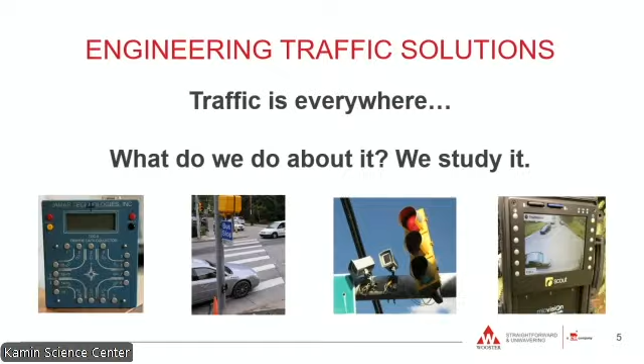Thank you, Jerrod. So I am Josh Haydo, Senior Traffic Lead at Wooster and Associates. I'm going to talk about the first aspect of these projects, which I take the lead on. It's a multi-step process. What we know is traffic is everywhere. So what do we do about it? We first have to study it. So I'm going to talk a little bit about traffic studies.

So first step in any sort of study, and in a traffic study as well, is identifying the scope. So that entails two major questions. What are the issues? What are the concerns? Obviously, when you think about traffic, you think about congestion. So that's measured in two different ways. Typically delay, which is how long you're sitting, waiting, not moving, getting frustrated when you know that you should be moving. And then that's directly correlated to stacking and queuing.

So, when vehicles experience excessive delay, they begin to back up. So that's not only frustrating, but it can cause safety issues when those queues block driveways, block intersections, or create sight obstructions for other motorists on the road. And another aspect of all of our studies that kind of weaves through all of these things is, of course, safety. A couple aspects of safety are visibility and sight distance. Being able to see other motorists on the road, whether they're approaching you, making sure they can see you when they're coming up behind you.

And also, when you're turning onto a road, being able to see to your left and to your right without obstruction to make sure that you have adequate room to merge out onto the highway safely. Speeding plays a role in that very thing, sight distance. Obviously, it's a little bit easier to merge onto a road when traffic is going 20, 25 miles an hour. When traffic's going 50 or 55 miles an hour, you obviously need to be able to see vehicles when they're much further away in order to make a safe maneuver.

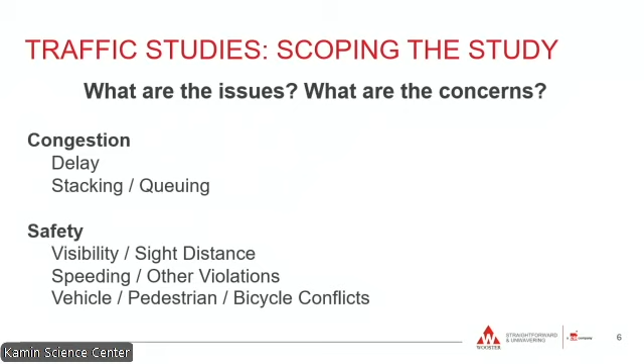And then finally, we're primarily focused on vehicular traffic tonight, at least in our discussion, but pedestrians and bicycles always play a role in that as well. So that's another aspect of our studies that's always there, in some cases or locations more so than others. Downtown Pittsburgh, obviously you're going to see a lot more pedestrians, a lot more bicyclists, but it's always a consideration when we are identifying the scope of the study.

So 3 basic questions. What are the concerns? Where are the issues? So, is it an intersection? Is it a series of intersections? Is it a corridor? And then when do the problems occur? So this could be days of the week or time of the day.

Typically, we look at peak hours, rush hours for commuting, which historically has been between 7 to 9 a.m. and 4 to 6 p.m. But different studies sometimes necessitate looking at other periods of time. We do a lot of work for schools. School arrival occurs between 7 and 9 typically, but school dismissal obviously happens starting at 2:30. So we're expanding our study timeframes to make sure we capture that school traffic.

Same thing, places of worship may have Sunday traffic that's its biggest peak in traffic. And then of course you have situations like here on the North Shore with 2 stadiums, the Science Center itself, a music venue, special occasions where those things may vary from day to day, week to week, different times over the course of the year.

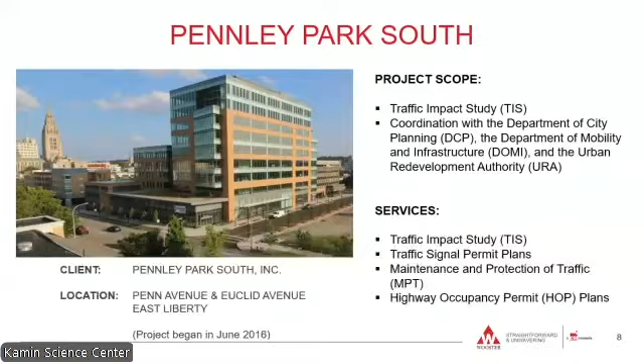So Jerrod briefly mentioned one of the projects we worked on. This is just kind of an example of applying those principles in the real world on a project that we did in the city. This is Pennley Park South in East Liberty. You may know it as the Whole Foods at the corner of Euclid Avenue and Penn. Some challenges we faced on this project were the presence of many pedestrians, many bicyclists, and at the same time as we were doing this project, which began in 2016, the city was in the process of converting Euclid Avenue from a one-way street to a two-way street.

So obviously we had to coordinate with a lot of different entities, the city of Pittsburgh, the Urban Redevelopment Authority, and others, to make sure that, when we were looking out in the future to when this development was going to open, which is the case now, our conditions that we were analyzing are true to what is actually out there, which wasn't the situation when we began.

So how do we conduct a traffic study? The first thing you need are traffic volumes, and collecting traffic volumes is as simple as you might think. You go outside and you count cars. The picture here on the lower left looks like a really boring video game. That's actually a traffic counter. When I first started at Wooster 13 years ago, one of the first things I had to do was sit on the side of the road for 2 or 3 hours at a time and count cars and press those buttons on that counter. And that's how we got our traffic data.

Technology's obviously advanced even in that short amount of time. We now use cameras. So this is the computer and the screen for a camera. It's mounted usually on a utility pole or something close to an intersection, 15, 20 feet up in the air with a bird's eye view of the intersection. That video is recorded and then reduced electronically, and we're able to have our counts without anybody being on the site except to set up and take down the camera.

And going even further, now we have drone capabilities where we don't even have to set up a camera. We can have someone set a drone to hover over an intersection and do this very thing, record that video and process it in the same way, and we have traffic counts within a matter of hours.

One other tool that we use, automatic traffic recorders or ATRs, you might know them as tube counters. You ever driving down the road in your vehicle and hear thump thump? If you're anything like me, before I knew what these were, that would always cause me to slow down when I saw them or when I hit them, thinking that this is the police or law enforcement out trying to give tickets. That's generally not the case. That's engineers like us collecting data.

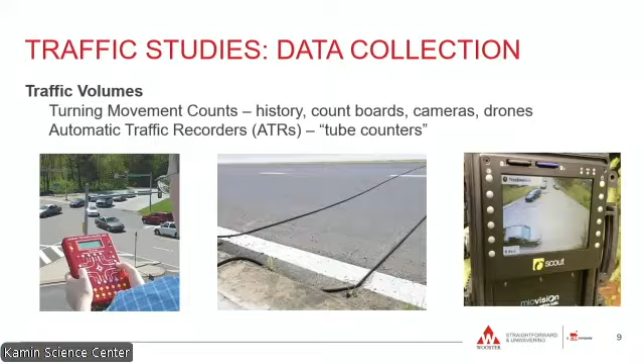So these are useful because they can be set for longer periods of time, can leave these down for days, weeks, even months, and they collect not only traffic volumes, but they identify speeds and also vehicle classifications. So when you're studying a traffic flow, it's important to differentiate and understand the composition of that traffic. Passenger cars operate differently than a delivery van or a tractor trailer. So understanding the composition of the traffic you're looking at is going to have impacts on the results of your study.

So as we're collecting traffic counts, we're of course identifying the presence of pedestrians and cyclists, looking at speeds. And then another aspect is, so we've talked so far about the traffic and the vehicles themselves. It's also important to identify certain characteristics of the roadway network itself.

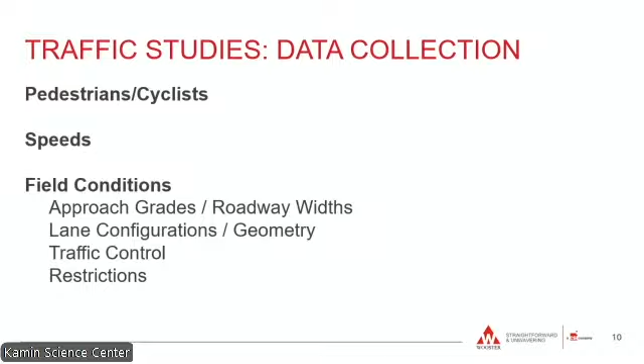So those are things such as approach grades and roadway widths, lane configurations, geometry, traffic control, be it a stop sign, a multi-way stop, traffic circle, signal, and restrictions, one-way streets, things like no turn on red. This is all information that we need to collect when we're doing a study to make sure that we're accurately modeling the study area.

So you have to deal with things like vegetation, embankments, parked cars, all things that we look at to ensure the safety of motorists, pedestrians, and bicyclists when we're conducting our studies. So at this point in the study, we have our existing conditions. We have what traffic is like today, the condition of the study area.

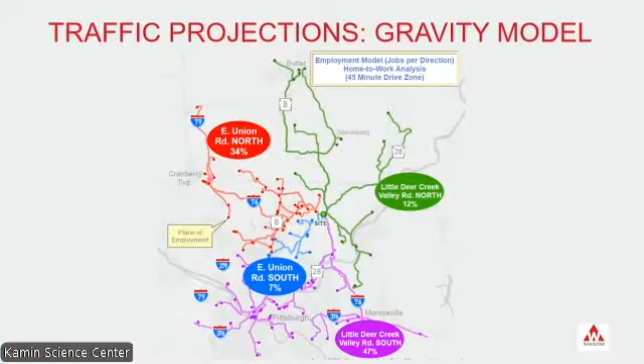This is just another example of a gravity model with a bit more detail. You can see it can get very, very granular in terms of the distribution of traffic. Now, the modeling. So we've gathered all of our information. Now we have to plug it into modeling software. There's a couple of different options. There's many more than this, actually.

We primarily use something called Synchro and SimTraffic. An alternative is HCS, and then VISSIM is a more robust model. We're going to show that to you at the end of this presentation in our case study for the West End Bridge. But they all do more or less the same thing. Some have some different capabilities, and this is technology that is constantly evolving.

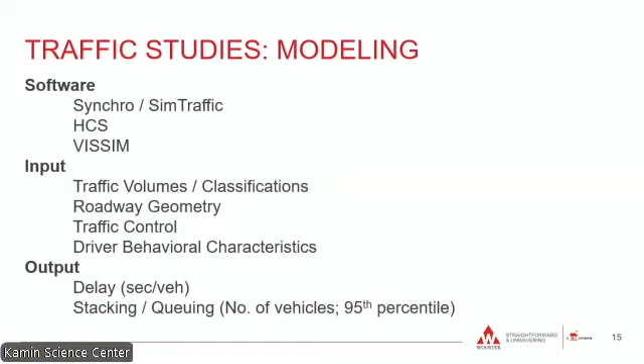We kind of already covered the input. That's all the information that we gather, the traffic volumes and classifications, information about the roadway, and we even have the ability to model and adjust specific driver behaviors. So in an area where drivers might be a little bit more aggressive due to congestion or other factors, all of that information can be put into the model to calibrate it, because we want our starting point or our existing condition in the model to look very much like what it is outside in the real world.

And then finally, the output. The output is the answers to the question we asked on the very first slide. What is the problem? What are we looking at? It's delay, which is measured in seconds per vehicle, and stacking or queuing, those are interchangeable words. Just the number of vehicles sitting in a lane at a given time, and how likely that line of traffic is to exceed a certain distance.

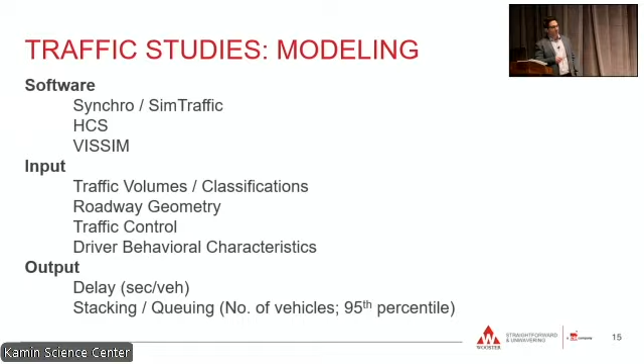So this is a visual representation of one of our models. This is out of Synchro and SimTraffic. It's not a video game. It is real data. This is an intersection that's just outside of what was formerly the Shenango Valley Mall. It's being redeveloped right now, and we conducted the study. So all of the information behind this visualization is that data that we collected. It's real counts, it's field measurements, it's the timings for that signal and the phasing that are being modeled there are all from real data from inside the traffic controller.

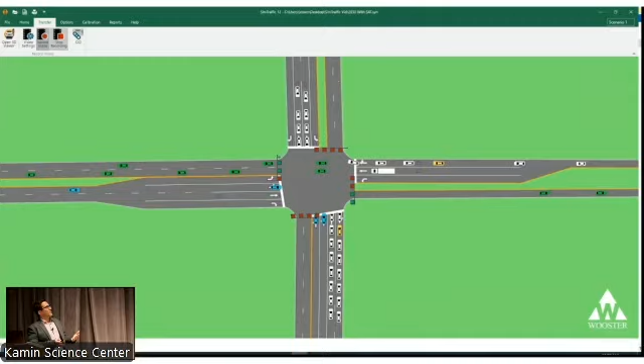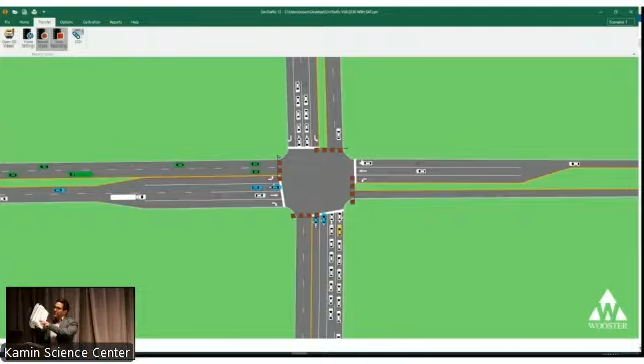This is playing on a faster speed just to kind of make it not quite so slow, but this is what we look at. The visualization is exactly that, but behind that is tons and tons of numbers and printouts and data, and that is a traffic study. So some really good reading material if you ever want to put yourself to sleep.

But all of that analysis and all of that data and all of those numbers lead us to solutions. So we identify impacts, we identify deficiencies, problems. Jerrod, my colleague, is going to come back up and talk a little bit more about how we implement those in the real world. The traffic study looks at these things operationally and says, how are they going to work? We're looking at models, but Jerrod puts pen to paper and is going to talk a little bit about how these are designed and ultimately constructed. Thanks, Josh.

What you see up here are the three most common types of roadway improvements that we design and we implement for solutions. Traffic impact study goes through and tells us exactly what we need to design and implement in the field. It could be one of these, it could be two of them, it could be all three of them, it could be a combination of any. At this point in a typical project, we're about 6 months into the process.

With the traffic study approval and everything identified, we now enter into the design phase where we start putting the plans together using CAD softwares, meeting all of the criteria books for everything we have. There's criteria for signing, there's criteria for pavement, there's criteria for pavement markings. There's probably about 100 books that would stack about this high.

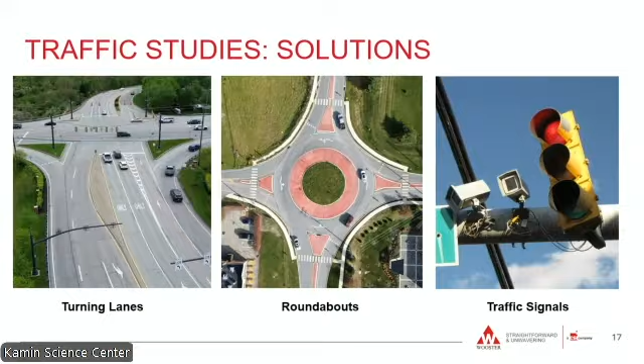So turning lanes, that's the first one I'm going to get into, is Josh talked about with capacity. If you've ever been driving on a single lane highway where you only have one lane, obviously you're stuck. If you're sitting at a light, you're 4 cars back, you want to turn right, you got to wait for the light. If you install a right turning lane for something like that, that obviously gives you more capacity. You're now able to go past the traffic that's waiting, make your right turn, and be on your way.

Sometimes it's a simple solution like that, a single turning lane. Sometimes it's a left turn lane, a right turn lane, but we get into dual left turns and dual right turns, which things get a little bit more complicated on the highway.

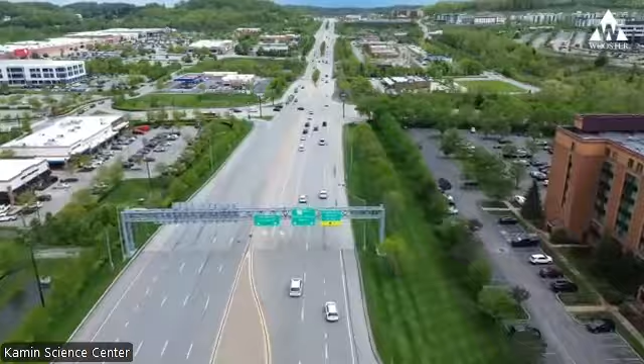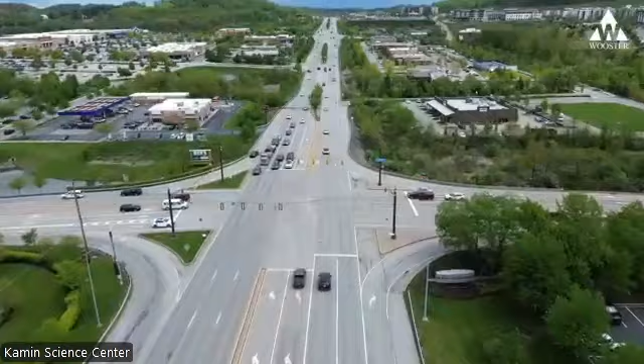This is a project we did in Cranberry Township. This is 228 right off of 79. This is coming up on the left. That roadway wasn't there. The project that we had was the commercial development on the left. That actually leads back to the UPMC Penguin practice facility. On the right used to be Westinghouse, then CONSOL.

Not quite sure if it's either of those right now, but that had about 1 million square feet of office in it. So you can imagine at 5 o'clock, this intersection had a ton of traffic, and we were adding to it with the commercial development.

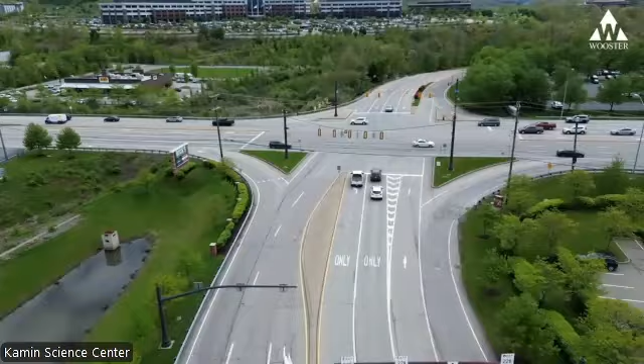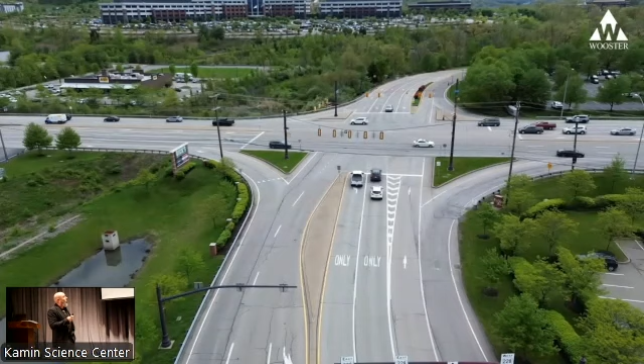So in order to make that work, what we identified in the traffic impact study was very much outside the box. On the bottom portion of the screen, we have dual lefts. On the top portion of the screen, we installed triple lefts. And we had to design that and make the traffic signal work so that those two movements could work simultaneously.

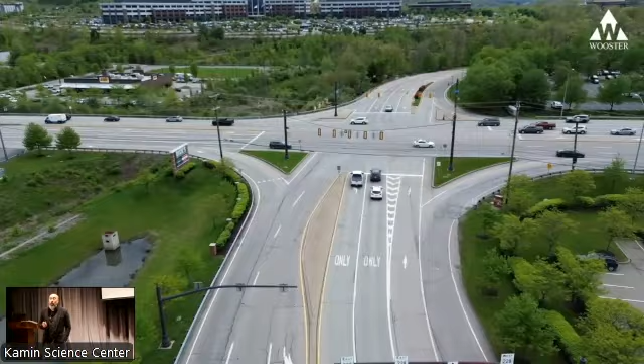When we brought that solution to Cranberry Township and PennDOT, they thought we were a little bit crazy because it's never been done in the state. So we went through and we put the plans together. We proved that it worked. We had to get creative with our design, but still meet criteria, make sure we're safe, make sure everything functions. And this is kind of what that looked like on paper.

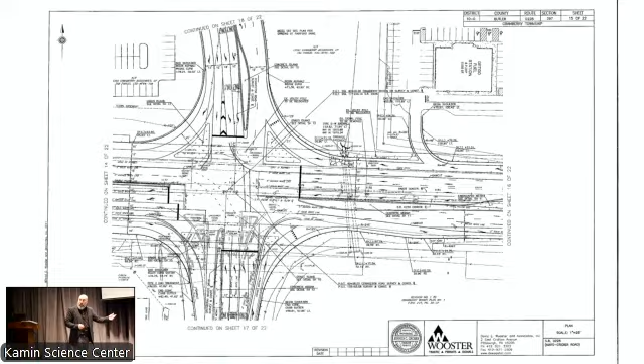So this is a single plan sheet. The whole plan set out of this was probably 200, 250 pages, a lot like that, but bigger. So you can see a lot of detail goes into this with our softwares that we have, with surveying modeling and our Civil 3D software, which is a CAD software. We actually create a 3-dimensional model of everything that you see on the screen that can get sent to the contractor. They can go out and build everything from that plan.

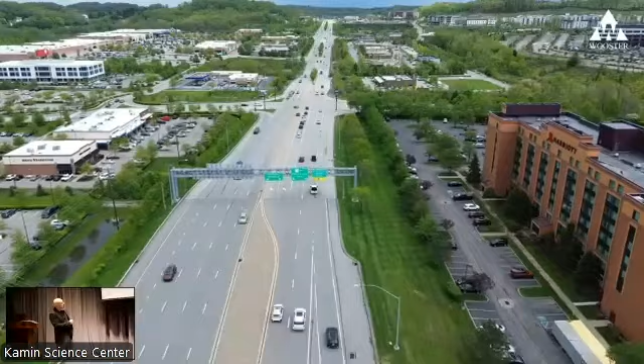So one of the, oh, sorry, wrong way. One of the issues that we have with intersections like this, which it's not going. There you go.

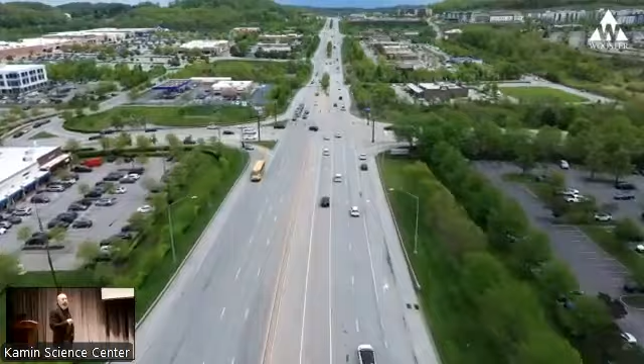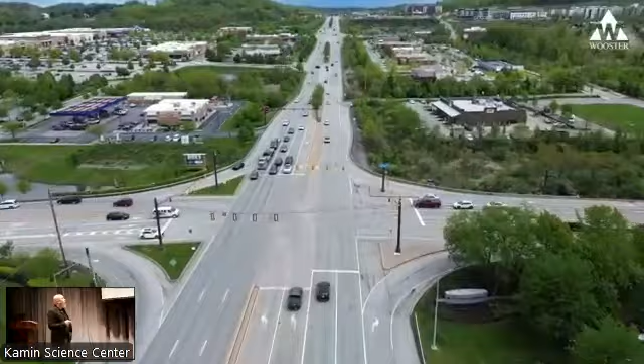Is the size. As Josh said, in the city of Pittsburgh, we have topography issues. We have steep grades. We have rivers. We have bridges. We have buildings right up against the roadway. A lot of things that limit us in installing roadway improvements that are this large, just due to constrictions. This intersection took up roughly over half an acre of asphalt. So if you try to put that down in an intersection in the city of Pittsburgh, obviously you'd have to knock down buildings to do it.

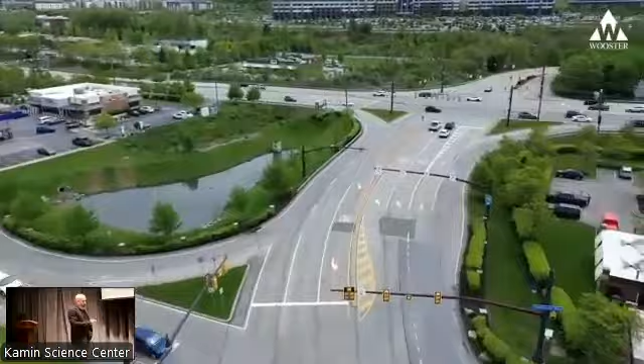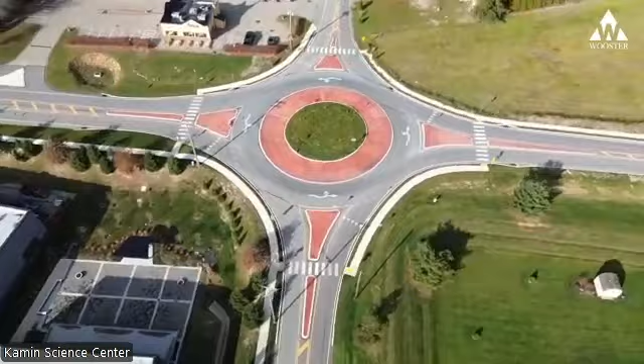So if that's the case and we identify that early, we go to the next phase, which is roundabouts. These are becoming a lot more common. Some of you might have driven through them, some of you might not have, but we look at these now anytime that we might warrant a traffic signal as an alternative to it. The reason we look at these as an alternative and why they're becoming more popular is safety.

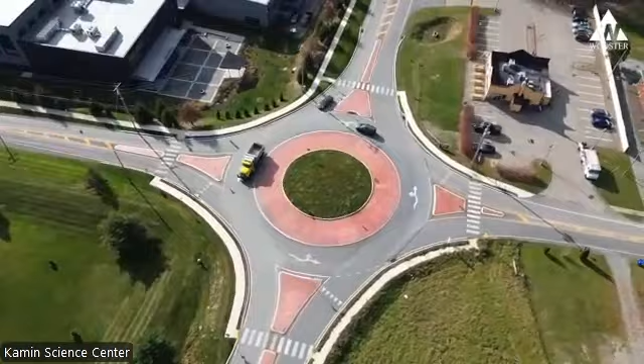When you install the previously mentioned turning lanes, a left turn, whether it's signalized or unsignalized, is the most dangerous maneuver you can make because you're actually pulling out in front of possible opposing traffic. Usually in those movements, the opposing traffic might be going 40, 50 miles an hour. If there is a crash, that's what we refer to as an angular crash. They're usually high speed. They're the most severe crashes that we have, and they lead to the most fatalities.

So with a roundabout, you eliminate all the left turns. So you increase the factor of safety on a roundabout tremendously. You don't decrease the amount of accidents, but you increase the safety by decreasing the severity of the accident. I don't know if you saw in that video, people still don't really understand how to use these quite yet. So there are side swipes and fender benders, the same amount of accidents, but the severity of them is completely lowered and there's no fatalities.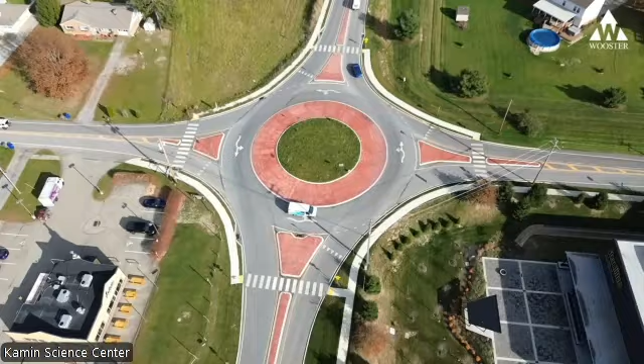Another piece of safety that happens here, because it's a large circle, we reduce the speed limit for the approach grades coming in. So traffic that might have been going, push the wrong button twice. Let's go back. Traffic that might have been approaching from this side was going 45 miles an hour. We reduced that speed to 25. So now we're dropping the speeds.

We're making sure that we have lines of sight for pedestrians that can see the cars. Cars can see the pedestrians. You can see the whole way through this so that everyone can see what's coming, which is another safety improvement for everyone coming through. The problem with this, from the sidewalk and the grading for it over here, the circle itself is 160 feet. The whole project is more than 250 feet across. So the reason it's that big is 79 is up here, Route 19 is down here, and this project was a large mixed-use commercial project.

So we have a grocer and a lot of commercial, fast food, a lot of residential, but we had to get large delivery vehicles through here, semi-trailers. So the red in the middle is what we call a truck apron. The truck is supposed to come around here just where the passenger cars go, but when that trailer off-tracks as it's making the turn, because they make really wide turns, says so right on the back, that trailer will track through here but not get hung up on anything.

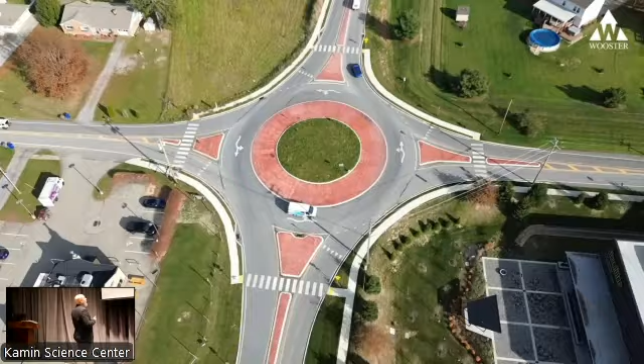But in order to do that, we need a lot of space. Again, this intersection was more than a half acre. All of the folks on the corners were happy with the project, so we were able to obtain the necessary rights of way. We had the room to do it. But again, you put this in an urban area or you put it in a city, we can't move buildings to make some of these work. So unfortunately, sometimes we have to forego those safety upgrades just because we can't make it fit.

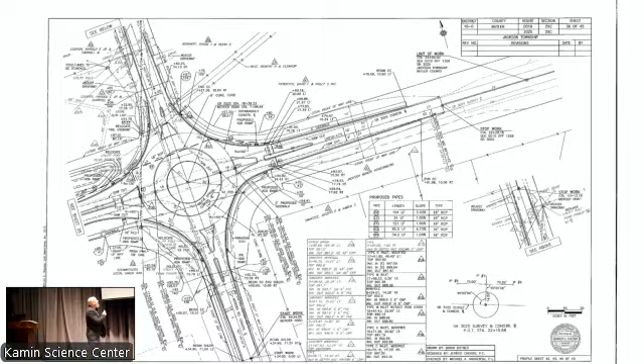In some cases, this is a plan of what that looks like. Again, similar to the other one, this was probably 150 pages of plan sheets, with the model for everything underneath. We can look at that model and actually see where a drop of water will flow so that we can drain the road properly. Tons of technology and engineering goes into creating what you saw on the screen.

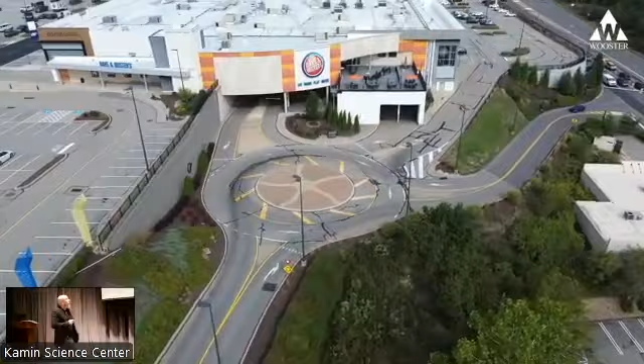So an alternative to that roundabout is what we call an urban or mini roundabout. This is much smaller. It's only 70 feet across. This is the Northway Mall in Ross Township. They approached us, as you can see, oh man, I keep pushing the wrong button. They had a very odd configuration as their entrance. So they brought it to us and tasked us with helping solve some driver confusion with an ugly intersection. So the solution we came up with is the mini roundabout, and it works great.

Same safety improvements, same capacities, everything functions well, but something like this, you can't get delivery vehicles through. So we can make them smaller. They work for passenger cars, they work for bicyclists, they work for pedestrians. But if you're in an urban corridor and you need deliveries, commercial projects, they just don't work.

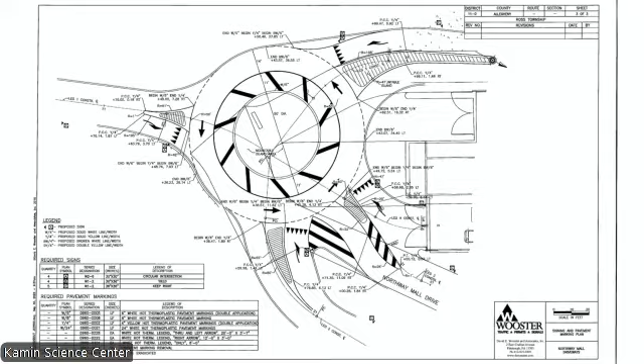When these don't work, it leads us to the most versatile thing that we have, which is the traffic signal. That's where the technology portion of what we do comes in. It gives us a lot of options on how to connect things together, which we're going to demonstrate later with the case study for the West End Bridge.

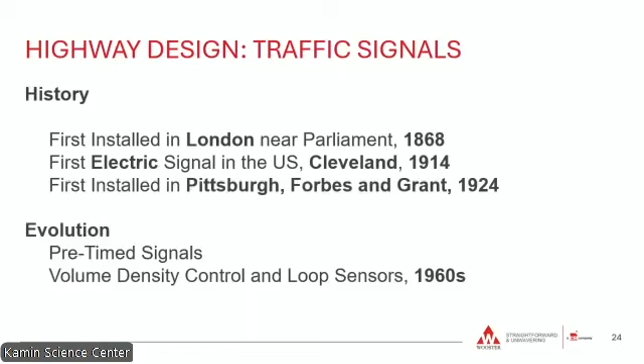Signals have been around for a while. The first one was in London in 1868. It was actually a gas light signal. I'm still not sure how that worked, but the first electric signal here in the US was 1914 in Cleveland. Then our first signal here in Pittsburgh, 1924. So 101 years of signals. They have come a long way.

But that timer would turn and change the lights from the main line to the side street every 30, every 60 seconds. That technology, unfortunately, is still in place in some of these. Even though we have new technology, new signals, everything looks good, you might run into a pre-timed traffic signal. If you've ever been sitting at a red light and there's no traffic, and you're waiting and waiting, you're at a pre-timed signal or something's broken.

But what happened in the 1960s is they developed what is called a volume density traffic controller. So that just means that they created detectors, which I'm about to get into, which are able to count the cars, know where they're coming from, know if they're coming on the side street, if they're making a left, if they're making a right. And that's able to tell the software in the traffic signal controller who needs to get a green light and for how long.

These are advanced detectors. So these are placed usually, depends on speed, but they're usually 250 to 300 feet away from the stop bar. So as soon as you get on the main line and you're 300 feet from that signal, it knows you're there. The way these work, and they've been in place for a long time, this shape, you actually run just a metal wire through it, loop it around a couple times. That goes back to the traffic signal controller. You put an electric charge on it, and it becomes an electromagnetic field. That's sitting in the pavement.

If your car goes over it, a large metal item disrupts that magnetic field, and it sends a signal, what we call a call, to the traffic signal controller, and the signal controller knows it's there, and then that begins to count the cars and know what is happening. It gives more and more green time with the more and more cars that are there. If that's in the left turn lane, it now knows there's someone in the left turn lane. It'll give that phase of the traffic signal a green light, and once it clears, it flips back. Usually we set the controllers to go back to what we call mainline green to give time to the main line where most of the traffic is.

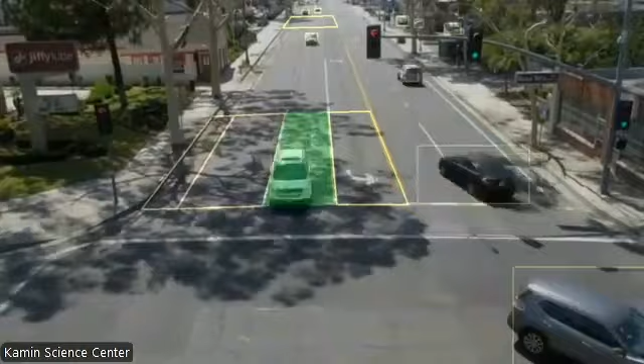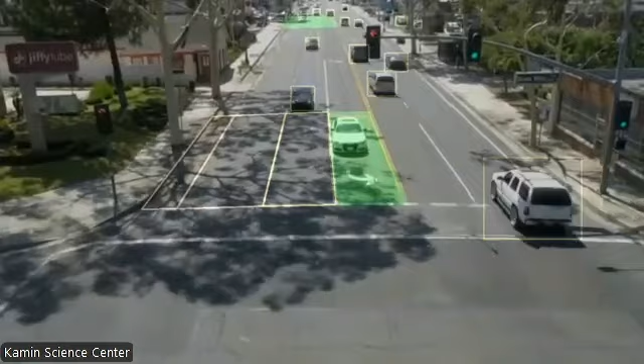To take a look at what this looks like, if you hooked a laptop up to the traffic signal controller that had a video camera, this is what you would see. You can see the yellow all the way up at the top of the screen. That's when the camera picks the car up and it knows what's happening. The green at the top is the advanced detection, so it knows it's coming. And then as this car approaches, this will light up. He'll stay green because he has to wait. This will go green, but then it'll disappear. That now tells the signal controller it's passed. So it counted it, but now it knows to release that call so it doesn't change the timing of the traffic signal. So this is the same thing at night.

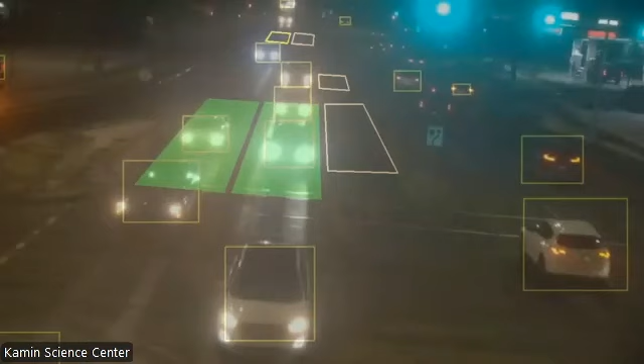This is the same thing in winter. This guy on the left, don't ever do what he's about to do. It's a bad idea.

Don't do that. So in all types of weather, these work, and they give us a lot of tools to do things that we'll talk about a little bit later in the presentation.

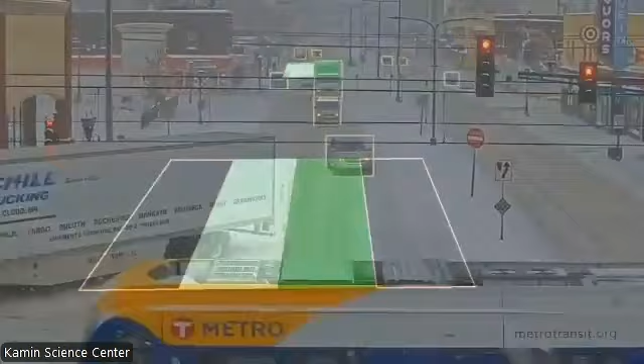This is another detector. If you've seen this, this is what we call a radar detector. Functions very, very similar to a video detector, but it doesn't have the video portion of it. It's just sending out a radar signal, and that signal is bouncing back. When it bounces back, same thing. It knows where the cars are. It knows what to do with them. It tells the traffic signal what to do.

So with all of that data, now that it's stored, the signals themselves continue to get more technologically advanced. And some things that we can do, instead of a signal being an intersection by itself, if you drive through a commercial corridor, when signals act by themselves and they're not talking to each other, you might start at a green light, you go 200 feet, and you stop at a red light. So what we do in those cases, now with some technologies we have, we're able to coordinate them. Now, you could coordinate 5 signals, 2 signals, 20 signals, it doesn't matter. There's a lot of systems locally that are doing that to have a better and safer flow of traffic.

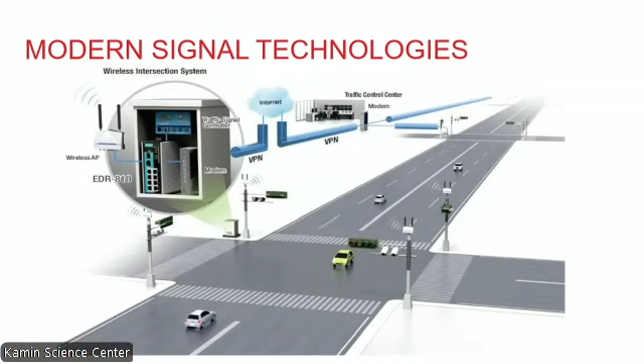The original coordination was called time-based. Basically, we would take the traffic impact studies, we would program the different times of day for your AM, your PM peak, your Saturdays at 12, and then we would connect all of those signals. We'd program maybe 10 of them, and then we'd set the clock inside of them to a certain time, and then they would change all at the same time, depending on the time of day. Sometimes the clocks don't run right. They get a little bit off. Sometimes the traffic patterns might change. Things like COVID clearly changed the traffic patterns that we have. And Tuesdays are different than Fridays, so you're kind of stuck with that programming.

Something like this, we can connect those signals directly with a fiber optic line or through an Ethernet radio, which is similar to like a Wi-Fi. So now those signals are able to talk to each other in real time. The detectors are collecting the data, storing that data, and it's sending it from this signal to the next signal saying, there's 100 cars coming, get a lot more green. And then that signal passes that information on and on and on. So this gives us a lot of powerful tools to, in a commercial corridor, really keep traffic moving. That leads us to

intelligent transportation systems. Now that the signals have all this technology on it, we're able to monitor that. What we have on this side, this is just a command center. This is a technician sitting in front of screens looking at those live feeds from the detectors, whether they're video feeds, they're looking at the data, the timings, the backups, the queuing, and they're able to make adjustments in real time, which is great. Now we don't have to rely on the signal to do it or timing to do it. We actually have eyes on that 24/7 that are changing things.

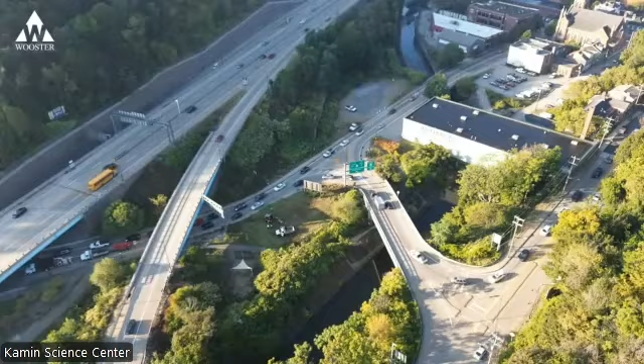I apologize for boring you earlier, giving you the background, but hopefully that helps demonstrate what we went through and the process behind this, so that you can better see and appreciate what we're doing here. A couple images here of the circle. This is the south end of the West End Bridge.

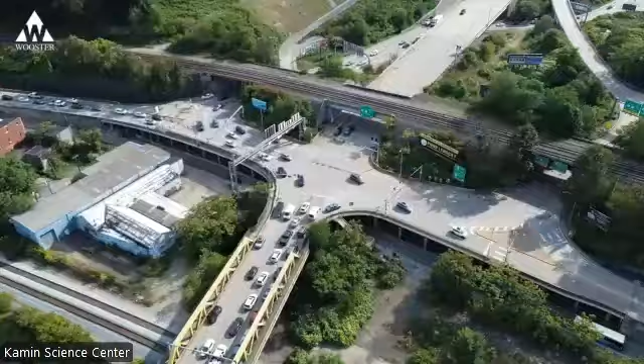As I mentioned, when we do a traffic study, we often look at multiple different time periods: AM, PM, maybe a Saturday. For the purpose of this demonstration, we chose to do the afternoon peak. It's one that we're very familiar with, and it actually just occurred here only a couple of hours ago today. So again, you see southbound traffic crossing the West End Bridge, or trying to.

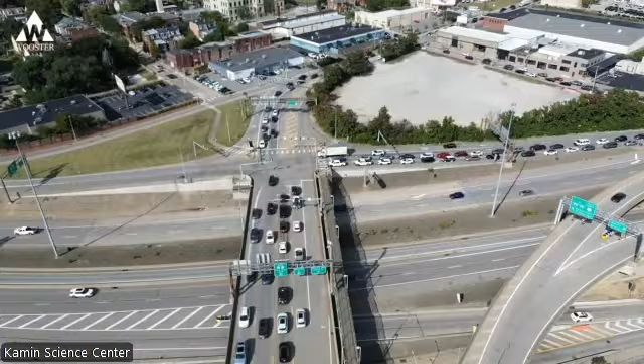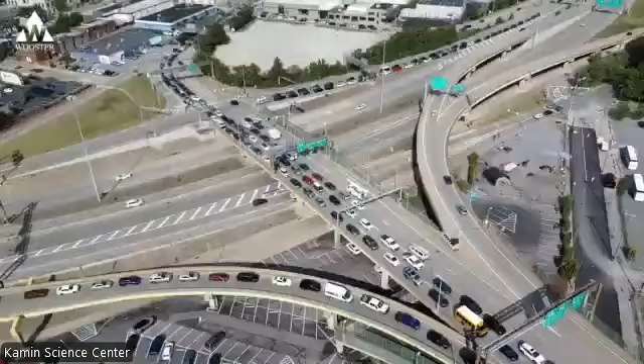And another big holdup, if you travel through here, this is 65, trying to turn left onto the bridge and not being able to. If you're ever sitting in this line of traffic, it's kind of sad because of this grade. You can see the light turning green up here, but nobody moving, because only on every other cycle does this traffic move so that this traffic can make their left turns. So you can see that situation happening right here.

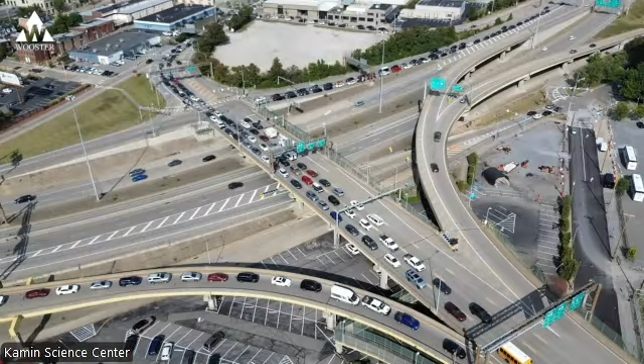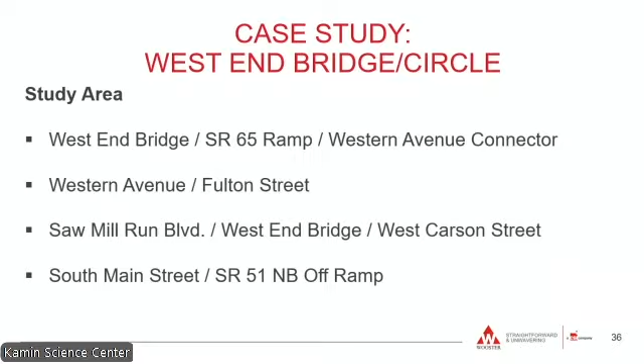If this traffic was to get the green light, they wouldn't be able to go anyway, because the holdup is actually at the other end of the West End Bridge, which is causing stacking all the way back and beyond the north side. So just briefly, our study area: we identify the intersections in question, the culprits in this case, two on either end of the bridge, all of which are signalized, operating somewhat independently of one another, not really connected, as Jerrod was just talking about, that interconnectivity with the signals talking to one another.

So we went out, we collected our data, we did counts, all the stuff we talked about, got field conditions, built our model, calibrated our model. We ran it a couple times, looked at it, and being very familiar with conditions in the afternoon in this area, we were able to say, well, that doesn't look right. Traffic on 65 backs up way longer than what the model was showing. So it took some calibration, but we got to a place where our existing condition was matching very, very closely what we experience in real life from day to day.

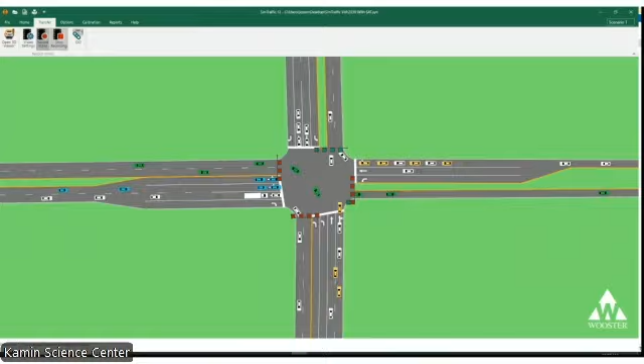The last one was something called SimTraffic. And again, it's far more robust, and you're going to see that immediately when I show you what that model looks like. So this is not a video. This is built the same way as the model you saw previously. Those cars are in a model. Those are based on the counts that we performed, the field measurements, the calibration, etc.

So this is the existing condition at this end of the West End Bridge. You can see the stacking southbound across the bridge. Eventually it starts to pick up and these queues will clear. But during all this time, you see traffic continue to back up. It even goes off the screen and off the model on 65 trying to turn left onto the West End Bridge. And it's also backing up further into the north side.

So here's some of our results. We identified that even though we only made a change at one intersection, West Carson, so the West End Circle at the far end of the bridge, we saw dramatic impacts at both ends of the bridge.

So what this table shows, I know it's a lot of information. Basically, it's just simply all of the approaches to each of these intersections, all of the lanes that compose each of those movements. And we talked about delay. It's measured in seconds per vehicle. So this is existing versus what we modeled as a potential solution.

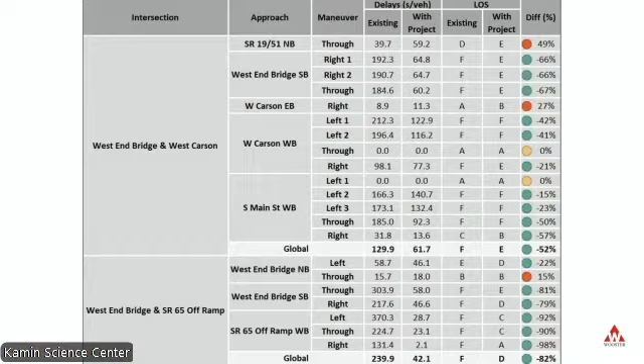This table is just simplified. It doesn't go into each individual lane. It's just all of the approaches at those same signals. And what I want to highlight here is the overall improvement at each of these intersections. So at the Circle, the West End Bridge and Carson Street, 52% reduction in delay. So imagine if you're someone who goes through that intersection daily, however much time it's taking you right now, imagine it taking half that much time.

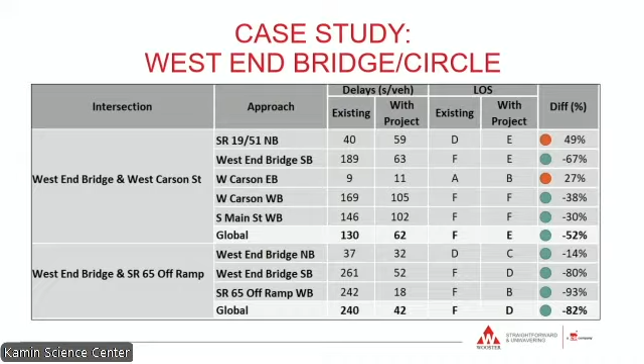And even though this is the only intersection where we modified the timings and the phasing and did any sort of modification to what is there today, it had a drastic impact on the other end of the bridge, the Route 65 off ramp. Globally, we reduced congestion or delay by 82%.

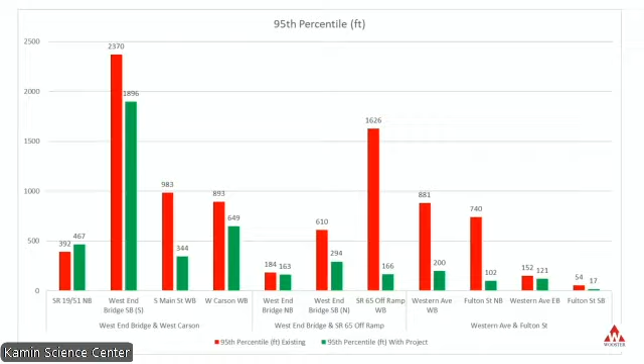Looking at some of these numbers, I'm going to highlight this one because this is the West End Bridge southbound, or going away from the Science Center towards the West End. That queue is almost 2,400 feet. That's almost half a mile under existing conditions. And you can see across the board, the red is existing, the green is with our modifications. Still have some excessive queuing here, but by and large, we're reducing those queues across the board. In some cases, very, very drastically.

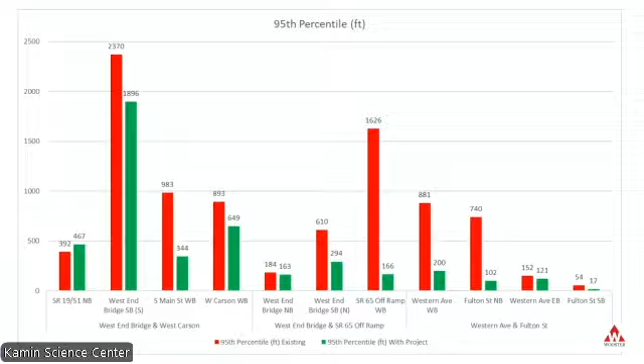So this is another critical one, the off ramp from 65, which was the one that backs up for so long. Because the West End Bridge is moving so much better, you're no longer getting through only on every other cycle, you're getting through on every cycle.

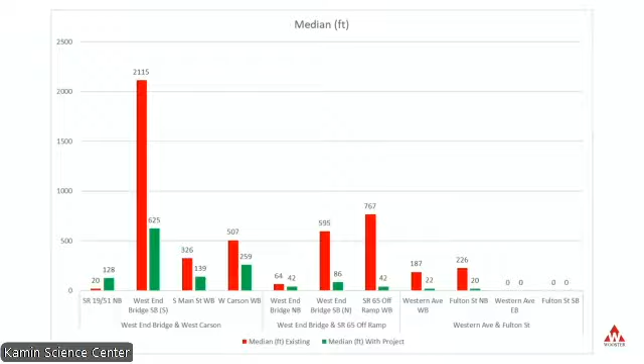So again, the West End Bridge, 2,100 feet, that's the equivalent of about 85 vehicles, reduced to 620 feet, which is the equivalent of 25 vehicles. So significant reduction.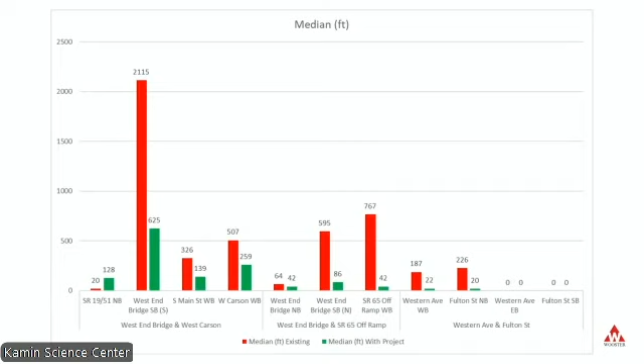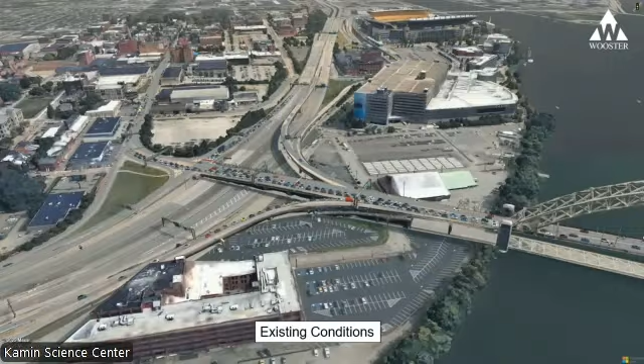So now graphs and charts and tables are all great. This is the same simulation I showed just a couple of moments ago. This is our calibrated model of the West End Bridge today. And it doesn't take an expert to see when I flip over to what it could potentially look like with these changes in place.

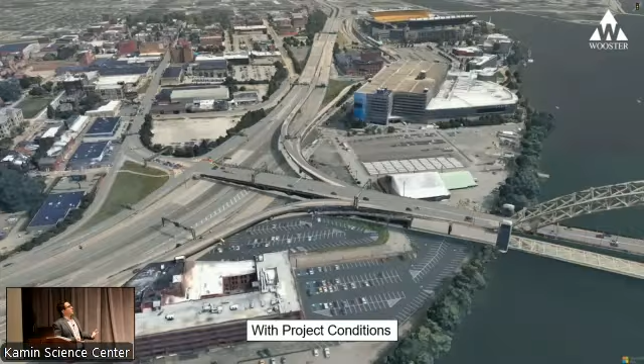Drastically different for the better. No more queues across the bridge, no more stack up on 65. Now, as this goes on and over the course of an hour, 2 hours, this will build. But this is kind of an apples to apples comparison of what we saw in the previous model. So it is demonstrative of the power of this model and of these tools and of this technology to make improvements without any physical infrastructure being added.

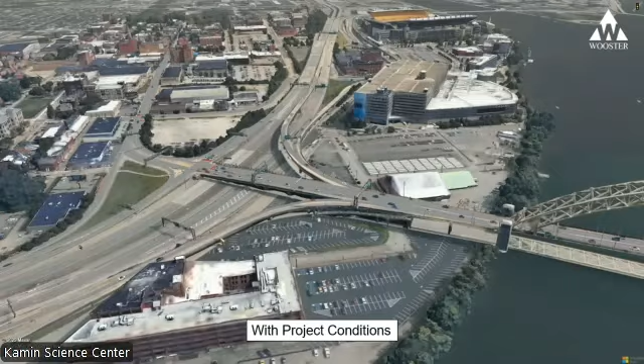So I do want to say that this is not a fully engineered solution. We did this as a case study simply to demonstrate the power of these tools and of this technology. But it certainly does paint a picture of the capabilities that we have. So we've talked a lot tonight about the past and the present, and this really kind of is the future. And we wanted to present you with an example of something that hopefully you've experienced, and maybe this gives you a little bit of hope about your future commutes.

So I know we talked an awful lot. Hopefully it wasn't too boring. We want to leave some time for questions. We love answering questions. So happy to answer questions about anything that I or Jerrod presented tonight, or even just general questions relating to traffic that popped in your mind this evening or throughout your day today. So we're going to be having someone in the audience. If you raise your hand, we'll come to you with a question. We also have some questions online. So every 1 or 2 questions, we're going to switch to online. So if you have a question in the audience, go ahead and raise your hand. We'll try to get to you.

Thank you for a great presentation. West End Circle, did that last Tuesday. Because my son said, I got to be at the airport by 8 o'clock for an international flight. Said, can you pick me up at 5 from Millvale? And then last Monday, he said, hey, I looked and the tunnels are really backing up by 5 o'clock to go out the parkway. Can you pick me up at 4? Did that. 28 was already backing up. Looked at Waze. It said, go 65 to the West End Circle. Stop there for a couple lights on 65 before turning onto the bridge. It then, instead of going straight there, sent me back roads from the circle and stuff.

Where's that side? In the middle photo right here, this was never there. So when you came to the West End Bridge 15 years ago, this was just a giant traffic circle. So you would have to circulate around to get to 51. They went underneath the train trestle, and they got rid of most of the circle to allow this movement to free flow. So it was there.

It didn't work great because you have the intersection of four major highways happening. So with what we proposed in this, that would allow this movement to do what it was designed to do, which is keep that traffic flowing off of the West End Bridge and open everything else up.

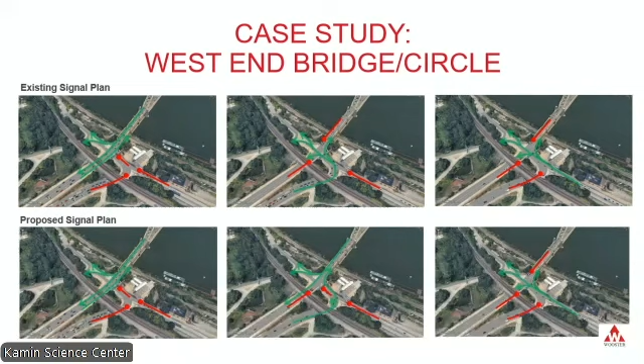Hi, I have a question about left turn lanes. Convention for many years was at an intersection, when the traffic would allow people to make a left turn, they were the first ones to be allowed to turn left. But I've noticed a change over the years where at many intersections, the left turn lane is held until the straight through traffic has predominantly run through the intersection. And that's like a change in convention that I was wondering, is there a significant improvement in the flow because of that?

Well, I will start, and Jared, if I miss anything, you piggyback. So a lot of signals are now equipped to make that determination of whether or not to put the left arrow first or at the end. Because what happens is when you have so much through traffic, and an example that I can think of off the top of my head, because I was in that area for a long time, is McKnight Road. You have so much traffic on McKnight Road, you might have a 200-foot left turn lane, but there's so much through traffic that it continuously blocks out that left turn lane.

So the through lanes fill up, you might only get 1 or 2 or 3 cars in that left turn lane. It doesn't make sense to give them all that green time at the beginning. You let the through traffic go first. Within that platoon of through traffic, all the people that want to get into that left turn lane fill up that lane. You do it at the end. So it all has to do with how much through traffic is on the road. You want to fill up that turn lane as much as you can before it gets blocked, before you dedicate a lot of time to it.

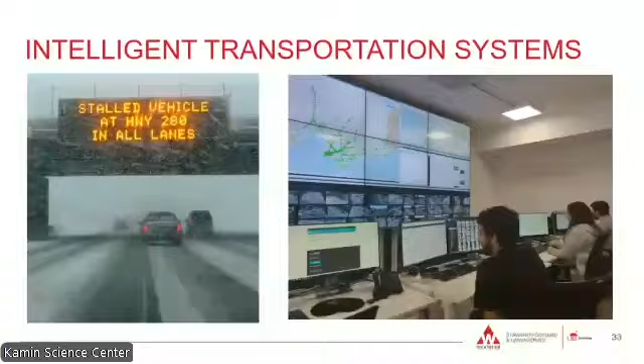Not yet, but we were actually a little smarter than that. When we knew that this was going to turn into a lot more development, we actually graded it and pushed all the sidewalks and any poles and utilities further off so that coming out of the UPMC facility, should they need more capacity, we allowed the room for it. So I believe we allowed for 2 future lanes to come through there. So if it's Wegmans that creates that need, I hope they give us a call, and we can certainly install that for them.

I want to quickly go through a few questions we have online. The questions keep coming in. I know we just have a few minutes left. Joseph asks, how accurate are those simulation results compared to the real world results?

Very, very accurate. Like I said, it's a number of factors, not just the vehicles themselves. We look at classifications, speeds, restrictions, things as tiny as the roadway widths. Vehicles travel slower on narrow lanes as opposed to wide lanes. We do the approach grades because vehicles that are stopped take a longer time to accelerate when they're on an upgrade. So yeah, they are very accurate. It's based on a methodology. We used to have to do it by hand when I was in college. That's all built into the software now, refined and updated over the years.